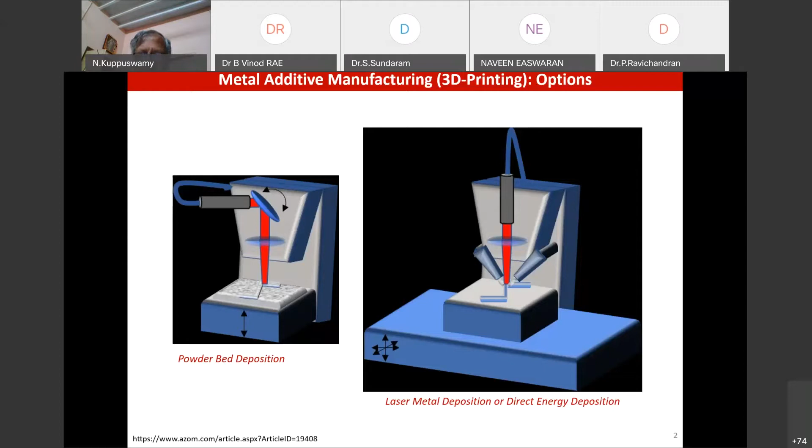In a powder bed machine, there are two methods of dispensing powder. One is from the hopper, which is above the bed. The other one is from the bottom, pushing up.

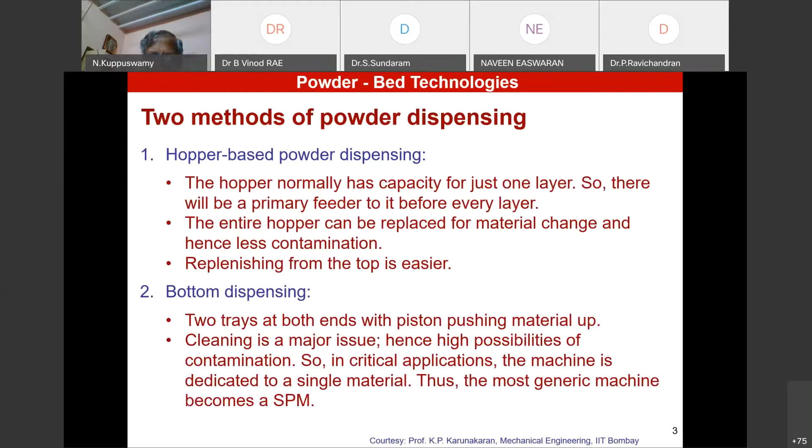If you're trying to use powder bed technology for instance, a sand mold for a polymer or ceramic, then you use a binder. The binder is sintered by the laser beam in position, so that's how we build the sand mold.

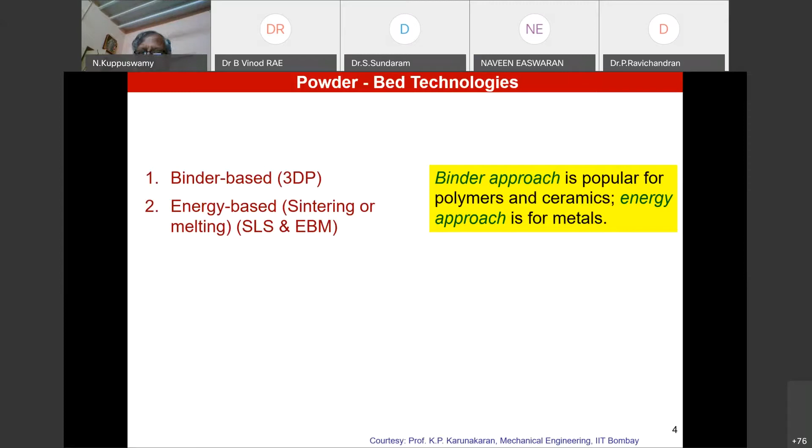I'm personally not very familiar with this approach. I'm more familiar with the metals, maybe because of my bias towards metals. For metal, we basically use energy, which is a laser beam or an e-beam, electron beam.

These are the companies, as of about 2 years ago, offering all this. Wherever I have borrowed Professor Karunakaran's slides, I have given him the reference, because I learned a lot about 3D printing from him. He ran a seminar in PSG about 2 years ago. Subsequently, I visited him in IIT Bombay also.

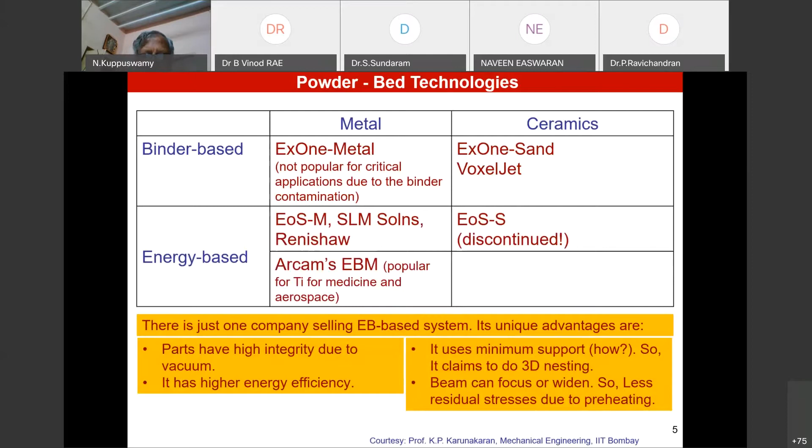Electron beam is very good for powder bed technology. The problem is the knowledge on how to control an electron beam is extremely limited in India, maybe confined to 3 or 4 institutions at the most. That's why it's not become popular. And these institutions are not meant for machine building, such as RRCAT or BARC. They have the knowledge, but not in machine building.

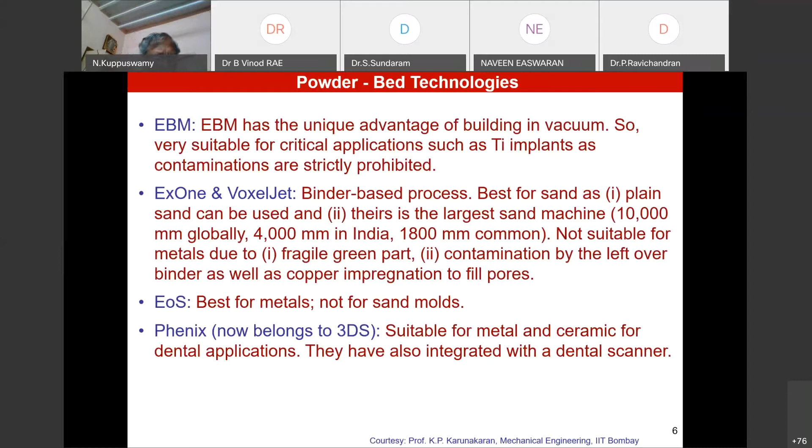Now, the most popular powder bed, which almost every Indian engineer knows, is EOS. The powder bed's major advantage for metal is you can control a 20 micron thickness. Of course, when you're going into 20 microns, a powder cannot be bigger than 20 microns, so you're talking about powder in the 10 to 15 micron range. You're also talking about a very high flow rate powder, such as a spherical powder with very little contaminants, which flows well.

The powder bed's build zone is typically 250 millimeters cubed. The bigger it is, the more difficult it is to manufacture. Whereas in laser cladding, you can have very long machines. There are multiple methods being used, so that's got a different scope. But you will never get a very fine part like the one in the picture here out of laser cladding, because in powder bed, the part comes out almost ready to use.

In powder bed, there's only one thing you can use: powder, nothing else. You can choose between irregular powder and spherical powder, though everyone advises spherical powder, but you could use the normal irregular powder. There's a huge price difference between spherical and irregular powder, and obviously a difference in performance too. Irregular powder gives poorer performance, but is typically half the price of spherical powder.

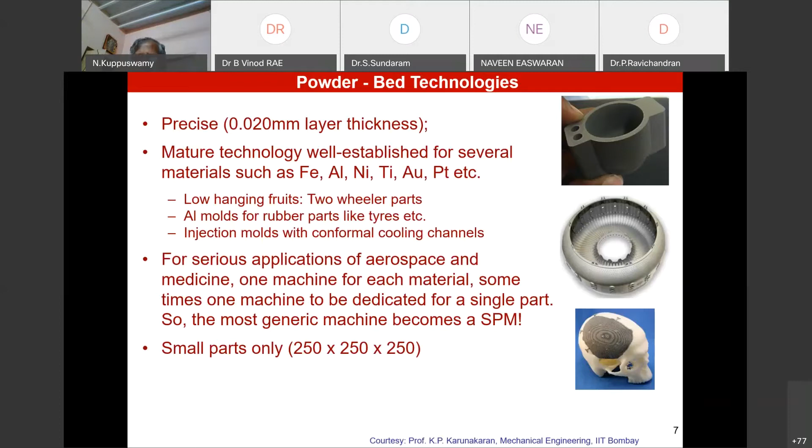When it comes to laser cladding or deposition technology, also called laser metal deposition, you have a choice between powder, wire, and strip. In this process, powder utilization is only 10 to 15%, whereas with wire you are able to go up to 90%, even 95% utilization. Same for strip. The disadvantage of wire and strip could be the resolution you are able to get and the layer thickness you are able to build, and in almost both cases you'll have to do machining subsequently.

Wire is preferred because a typical wire costs, for instance for titanium, about $45 to $50 a kilo, whereas powder for titanium costs $200 a kilo. So it's a huge difference in price, but of course, most people prefer powder bed.

Just give me one minute. Santosh, I'm in a call, I'm in a seminar. Anything urgent? Okay, I'll come back to you. Sorry about that, okay.

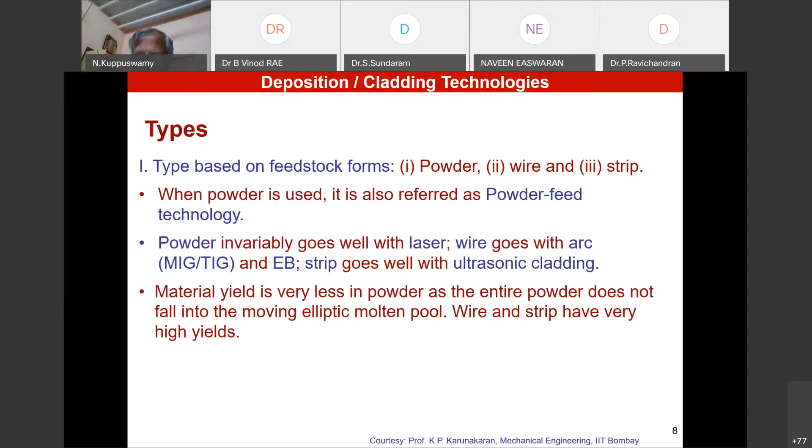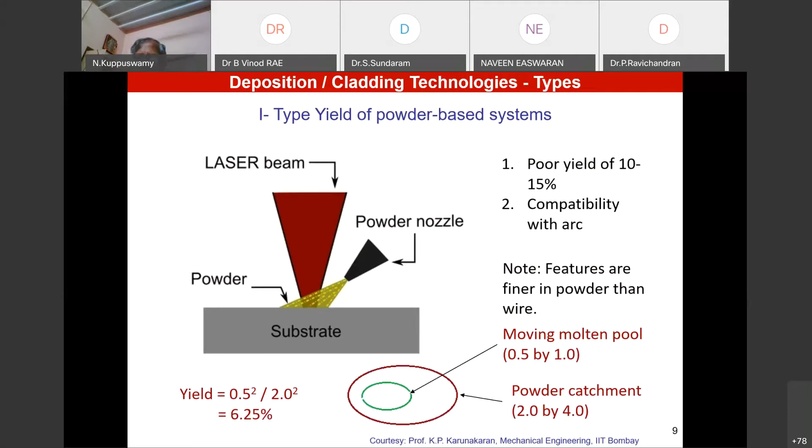Now, this is how the typical laser metal deposition schematic looks like. You have the laser beam, the powder comes in, and it creates a melt pool, and you rotate the melt pool around. I'll explain this further.

You have the laser, the electron beam, or the arc — these are the three energy sources available. In terms of quality, performance, and running cost, electron beam is the best, provided you know how to use it. Maybe I'm biased because I used one in my PVD machine for about 10 years. Electron beam is used where you need a controlled atmosphere, required when the quality of deposition has to be perfectly controlled, such as in a medical implant like a knee implant. Now, arc is also a very good way of doing it; Cranfield, especially, is a pioneer in this area.

For instance, if you use a TIG machine, you're looking at millimeters and will require a lot of allowance for machining, but it's low cost.

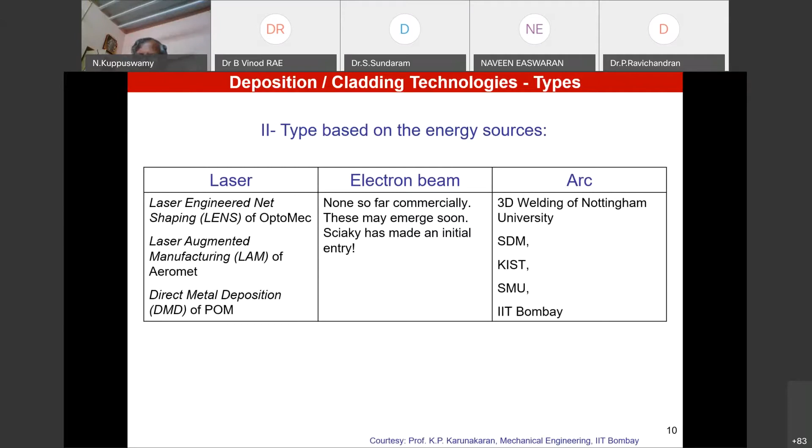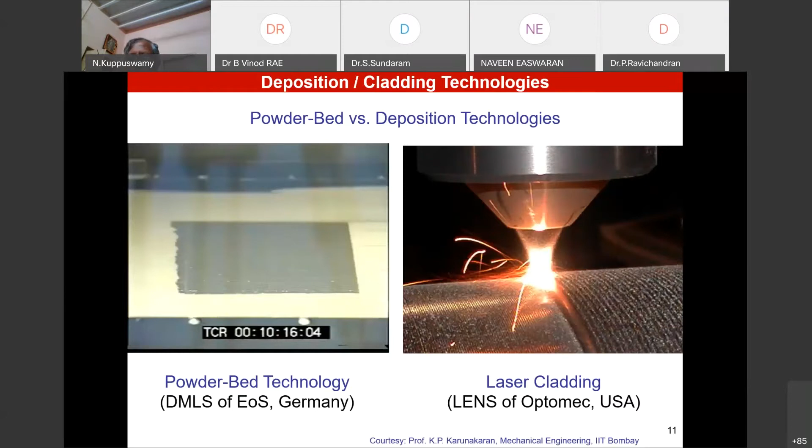Now let's look at, on the left, you have the powder bed screen, where you don't see the laser beam movement in this picture. On the right, you have the typical LMD, laser metal deposition or direct energy deposition. In the olden days it was called laser cladding, and this picture is very similar to the lens model. You have the powder and the laser coming in through the nozzle, and in this case you are repairing a shaft—you're not making the whole shaft by 3D printing. You are basically resurfacing the shaft or a roller, typically done in the paper industry or other industries, rebuilding the portions which have been removed by abrasion in use.

Okay, this slide explains to you a little bit about powder bed versus laser metal deposition.

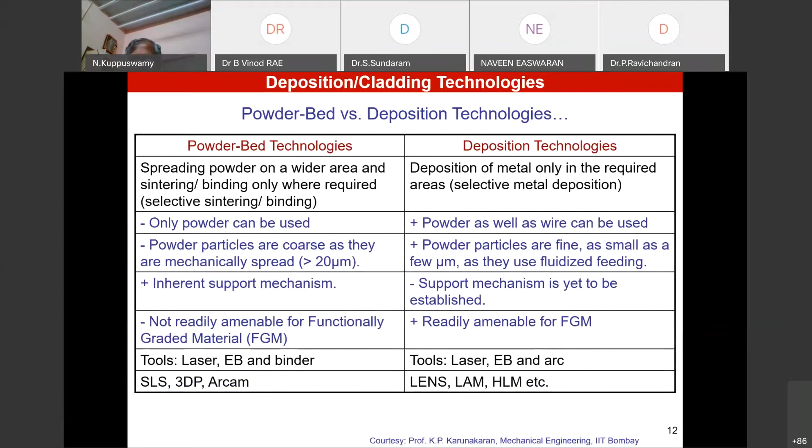Now these are typically some examples done by laser metal deposition. I know there's a question—you're supposed to be talking about powder bed, why are you talking about laser clad deposition? These are all complementary technologies. Powder bed and laser metal deposition are not competing with each other. There are applications where laser metal will work, and applications where powder bed will work. For India, where we have a problem with quality powder and are quite worried about the cost of the part, laser metal deposition is quite useful.

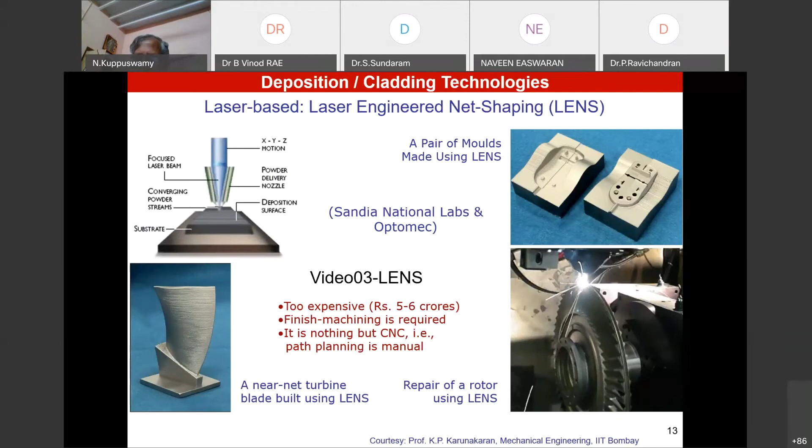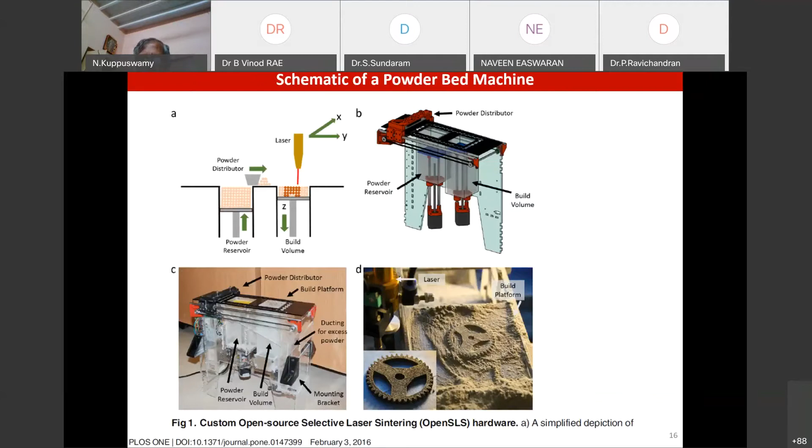Now here in a powder bed machine, the most critical part is what is not shown clearly here, which is the galvo, or the part which controls the movement of the laser beam to match the geometry of the part you're building. This is the whole galvo, and if you look at it, it looks like a black box.

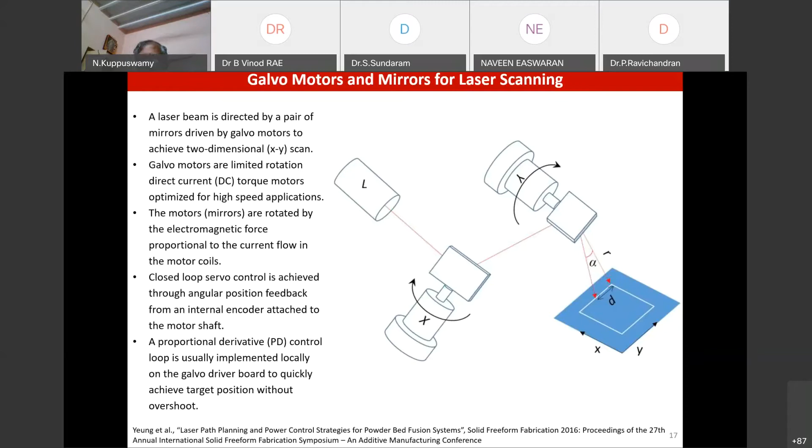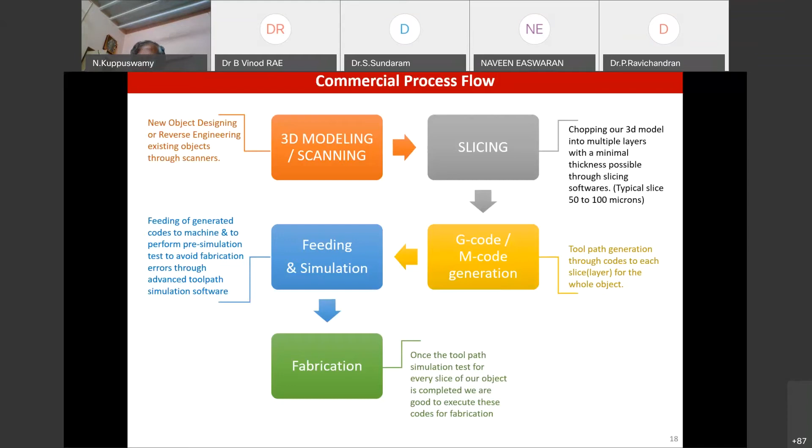This is a maiden, I would say, Coimbatore approach to building an SLS with CNC movement, because the engineer I was working with, my process engineer, design engineer, about 3 years ago, when we were working on knee implants, we said we don't want to import an SLS machine, even if it is for nylon, let's try and build one. Therefore we started putting the design together. Here we have not gone for a galvo because we couldn't source one in India, we were apparently buying a Chinese Shenzhen galvo. Therefore he came up with a CNC movement for the laser beam, and that's how we approached the whole thing.

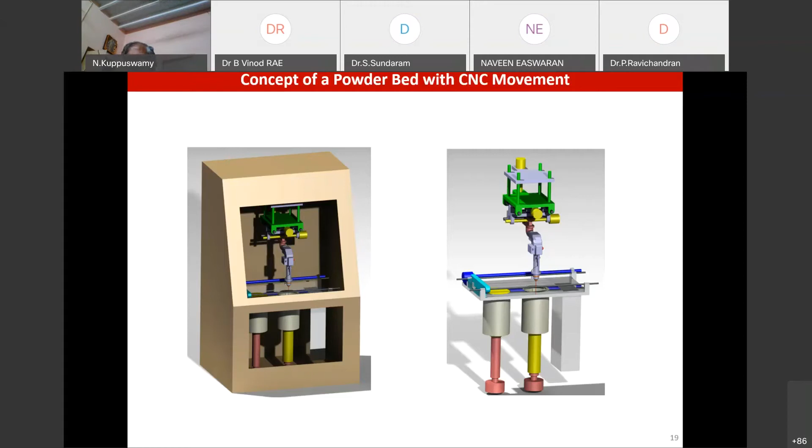You have the powder hopper, then you have the build hopper. The pink one is the powder feeder or powder hopper. The one on the right, which is yellowish, is where the part is getting built. Then here, instead of a galvo, he is moving the laser beam by using a welding head and the CNC attachment with it.

This is a novel approach. The advantage is that CNC controls are fairly well understood by a lot of people because it's very popular. One thing you have to remember is a typical CNC control goes with a ball screw, and a ball screw typically has got a pitch in terms of millimeters, whereas here our movements are in terms of microns.

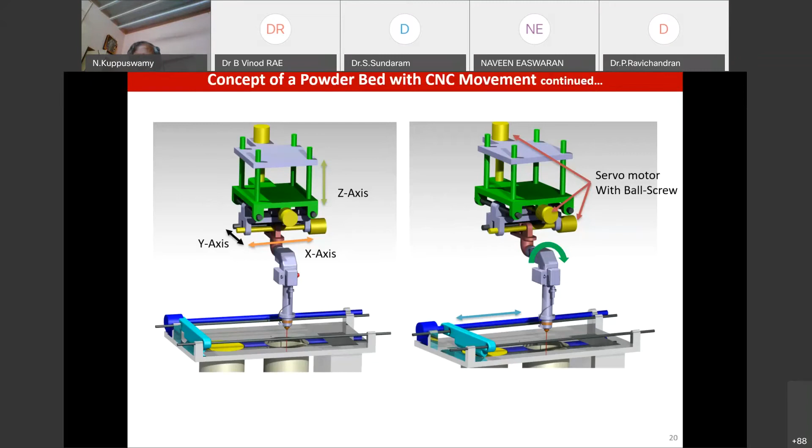Therefore you have to introduce one more element in between, like a cam or a worm gear, so that even if the ball screw rotates 1 RPM, ultimately the movement you get is in the region of microns. That's a detail which we have solved, but it's critical for using a traditional CNC approach for a powder bed movement or even the laser bed machine.

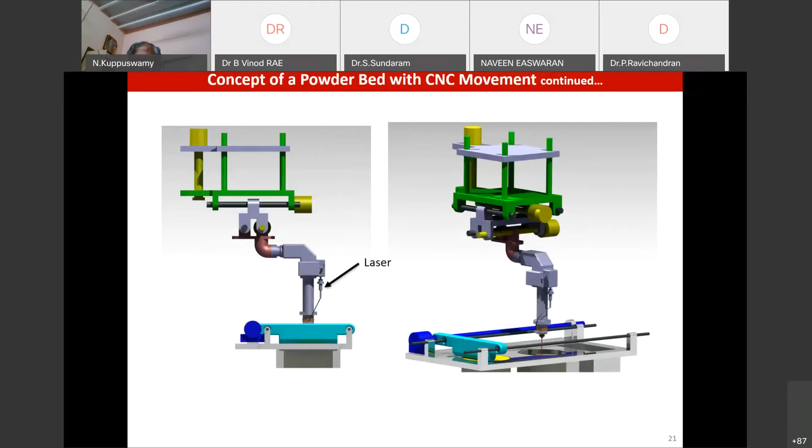We did all this work when we were thinking that the funding was going to come through quickly for the laser metal deposition machine, which is required for the manufacture of the knee implant. This machine was supposed to do the prototype in nylon. When that funding got delayed, we put all this on hold.

Earlier I talked about the laser which is used on an SLS machine for nylon. This is a very popular kind, coming out of Lithuania. It's a very small one, fairly expensive compared to Shenzhen, and this is in the region of 5 to 10 watts. This is what is used on a nylon machine. The one for a metal machine will be much bigger, of course.

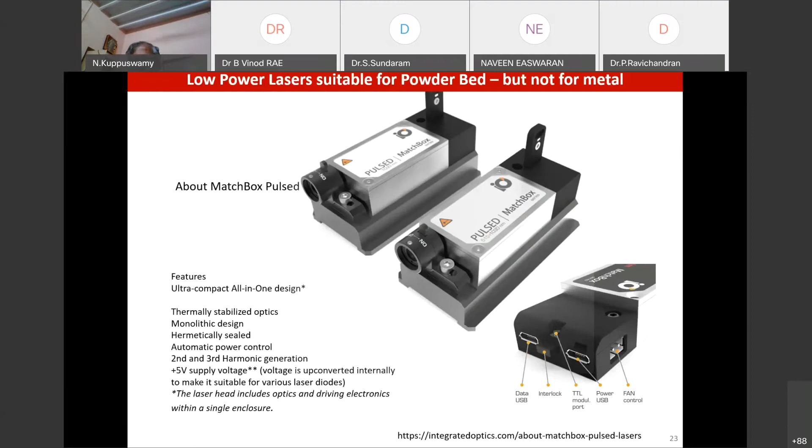Now we have taken an approach that it's got to be used for vacuum. Now that's the first decision you have to take.

In a powder bed, it's very difficult to make such decisions because almost only Arcam makes such a machine. Whereas in laser metal deposition, it's easy to make such a decision.

Now why do you have to worry about vacuum? For non-metallurgical, non-material science engineers, especially mechanical engineers, atmosphere control is very important for the functionality of the part. If you use it in normal atmosphere, you have oxygen pickup issues. In the case of titanium, oxygen pickup is very high, then the part becomes brittle, and if the part is brittle, it will not function. That is why, for instance, ASTM specifies titanium should have a maximum of 0.28% interstitial oxygen.

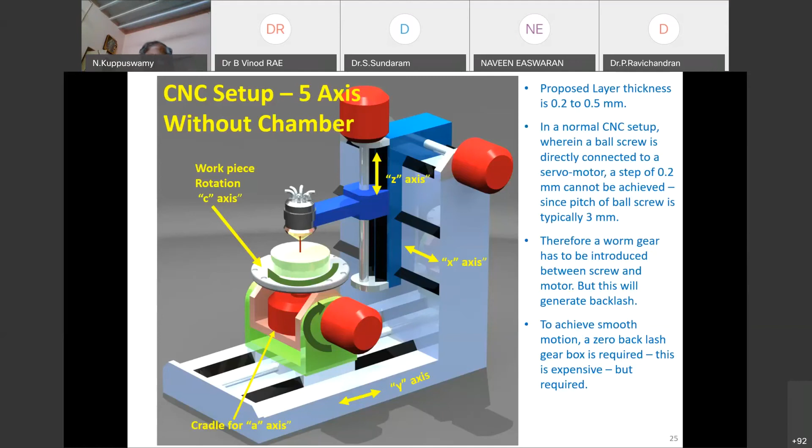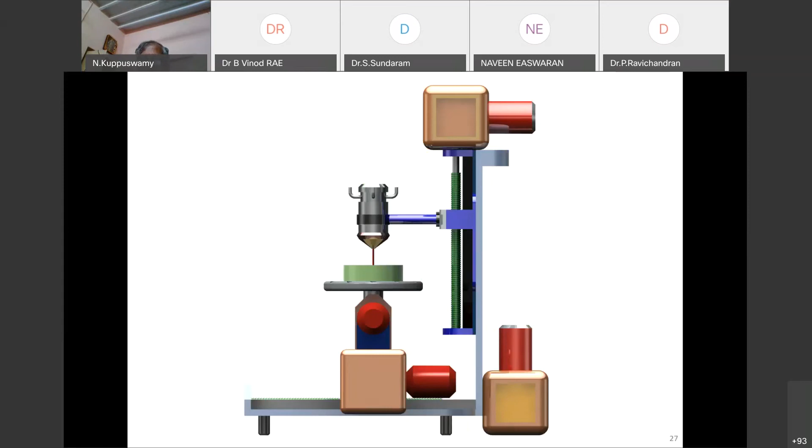Now, again, I said, don't worry about the position of the motor, what the motor looks like. Just focus on it as more of an artistic concept. We have not engineered it to a detail. Look, it's fairly compact. You can see the dimensions. And so can a powder bed be.

In fact, please feel free to contact me if you're making a powder bed, especially for PEEK or for nylon. It's really worthwhile. The cost of the laser is low. You can have very good, beautiful looking parts. And PEEK especially is advantageous because it's functional parts. In many cases you're able to get engineering plastics, or even implants in certain locations where it's not especially load bearing.

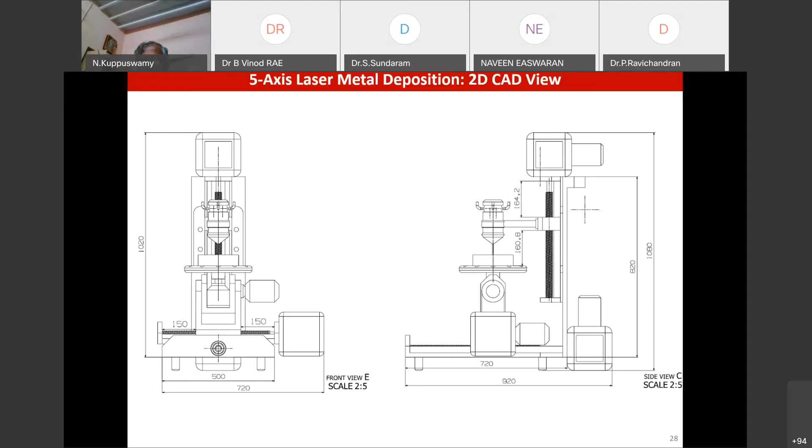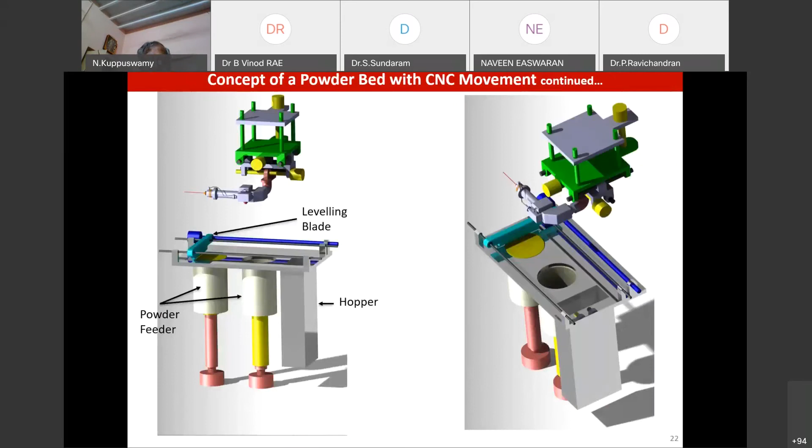Okay, we'll go back to a powder bed and then I'll request questions if any. Okay, I'm all yours.

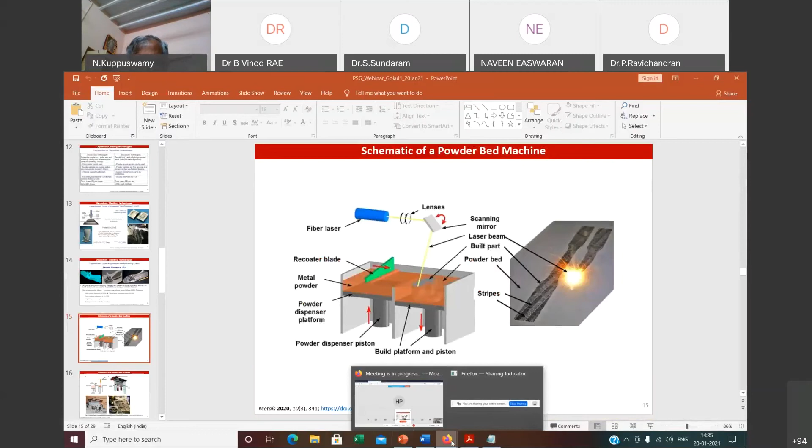Hello? Yes, sir. Participants, if you have any query, you can unmute and you can speak to the resource person.

Good afternoon, sir. This is Arvind Kumar from PhD Tech. That's a very good presentation, sir. I have some doubts on the control software for laser power source control. So far, what software is used for controlling these laser parameters? Is there any standalone software available in the market, or do we need to make it for our application?

If you're trying to decide on the laser power, whatever you need comes with IPG. And the welding head or the collimating system you use decides the spot size, which is critical. Those are all fixed, or the range is fixed, when you buy the laser and the accessories. The software typically in your control, on the machine, is the one which takes the G code and translates it to an actual laser path, like in a Galvo or in your CNC movement. Those software are not easily available.